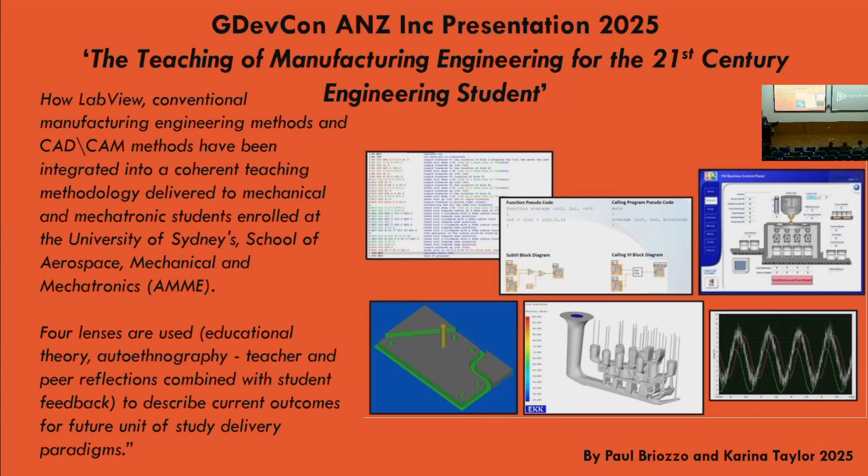All right, so where did it all sort of fit in and where were we at? The subject we ran was located in third year. It's called Manufacturing Engineering, a humble little thing. And we ran it - I was involved for about 25 years.

And then one day, I was involved in a spark ignition engine project and we needed to get data out of it. And I said, well, there's this thing called LabVIEW. It's a 1-week course. I'll go and do the course, come back and do the LabVIEW bit. And he said, yeah, that's a great idea. I did the course. Karina was the lecturer. I came back and realised, hang on, this is not easy.

So phone call to Karina. She'd left, I think, NI by that stage. And I think we were her first customer. But anyhow, that's all history.

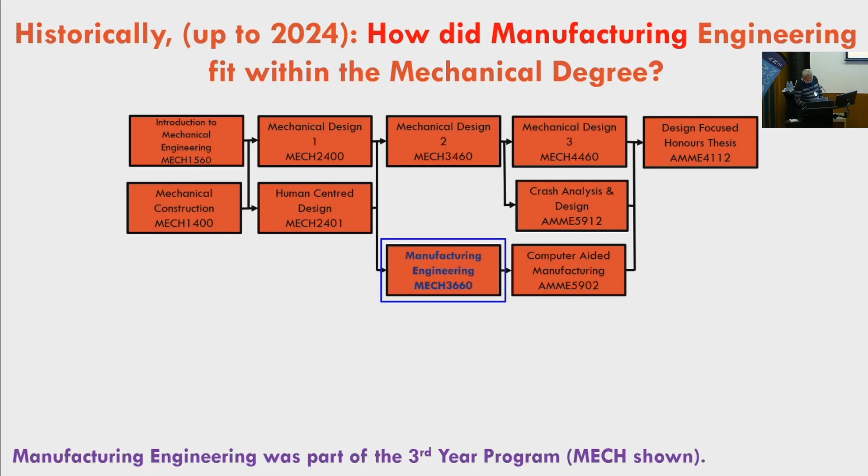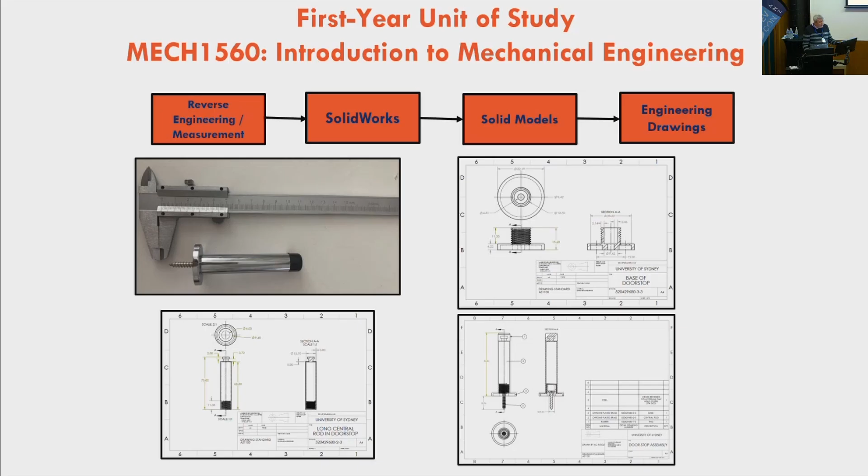So that's kind of where it fits in, sort of into the third year sort of program. And where it sort of started - typically, our students start off obviously in first year, and I'm a mechanical person. I know a lot of you here are electrical, but there's some similarities. We eventually do meet at the end, and so we give them kind of hands-on mechanical kind of projects like reading engineering drawings, becoming familiar with CAD packages like SolidWorks. And they go off and construct little steam engines or air-powered motors like this.

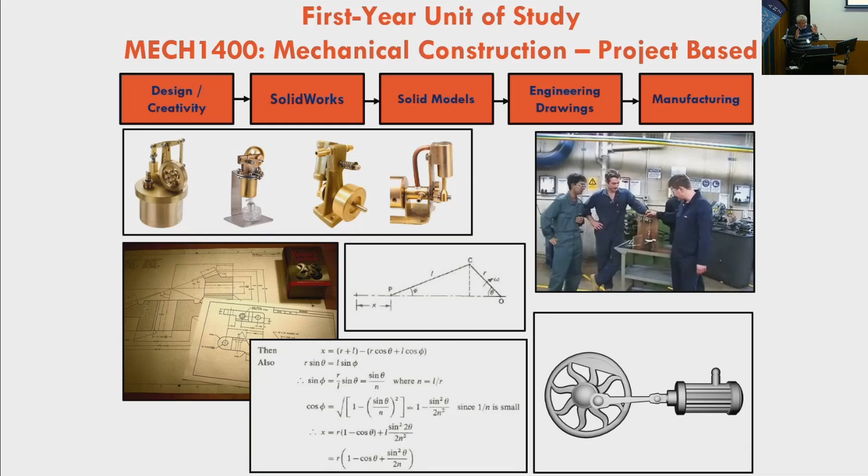We introduce analysis and the like. So gradually they're developing their hands-on skills and the ability to sort of turn something that's not just an idea into a physical kind of product, which is always good.

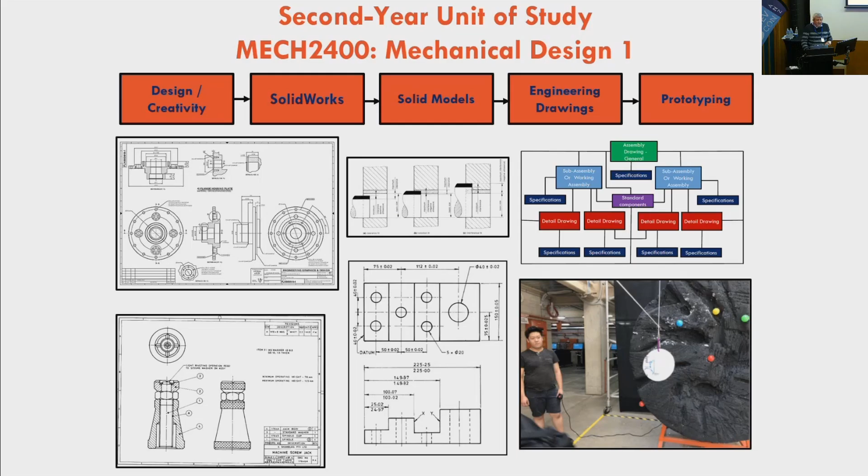Then they come to another unit of study called Design 1, which is a kind of a precursor to manufacturing. So students learn about tolerancing, more about engineering drawings. They get involved in a little competition of sorts, but no physical products are yet created. And that sort of combines with FEA type studies in Design 2.

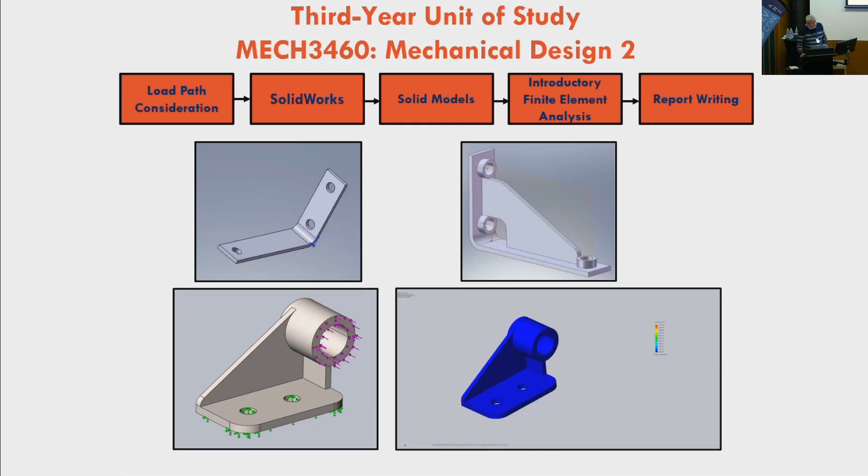I don't know if that one works. So we introduce them to stress analysis and the like using SolidWorks. And we use a finite element sort of solution for some of their designs.

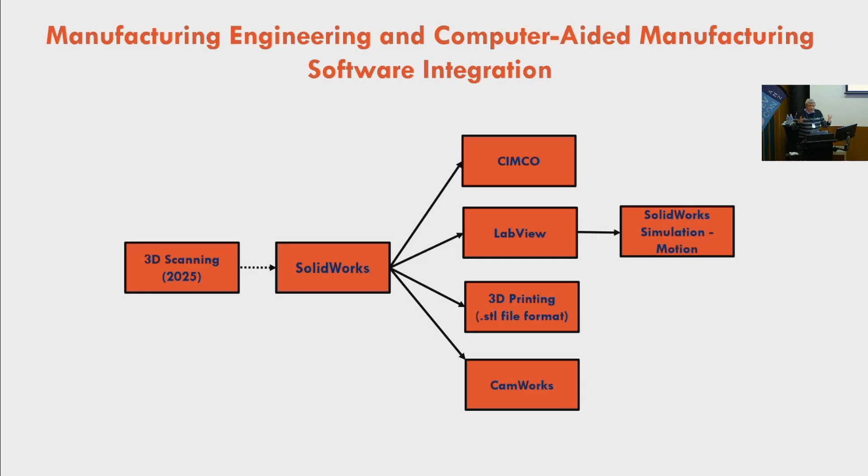So that's, if you were to break up the kind of software that they've been exposed to - and we're going to go through in a bit more depth to some of it. I think this is on auto, I'm not sure. So we've got SolidWorks and machining software, LabVIEW. We talk a lot more about SolidWorks simulation motion, controversial topic. We get them into 3D printing and also a bit more automated CNC machining. That's the sort of software that we generally use.

So there's also things like cutting forces, jigs and fixtures, structures and kinematics, casting, shrink fits, metal forming, welding processes, powder metallurgy, rapid prototyping, and a bit of a review.

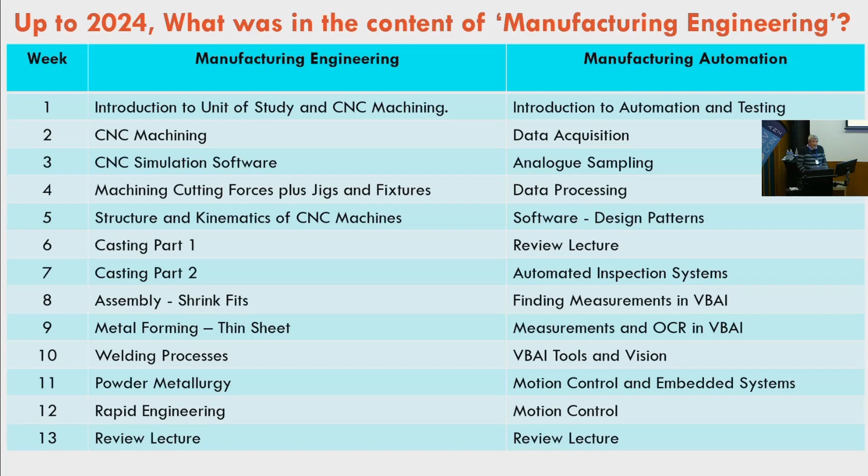So on the automation part, see if I get it right. First of all, automation and testing, data acquisition, analog sampling, data processing, software design patterns, automated inspection, measurements in VBAI, measurements and OCR in VBAI. I know them by symbols and the like. VBAI tools and vision, motion control, and the like. So quite a lot to do in 3 months, just over 3 months.

So these are students who typically have no exposure to LabVIEW. They're usually mechanical or mechatronics. So you begin to see a bit of a development.

So unpacking this a bit more, I mentioned CNC, and that's the computer numerical control side. So it's just like writing very simple little codes, machining, how to machine a little slot.

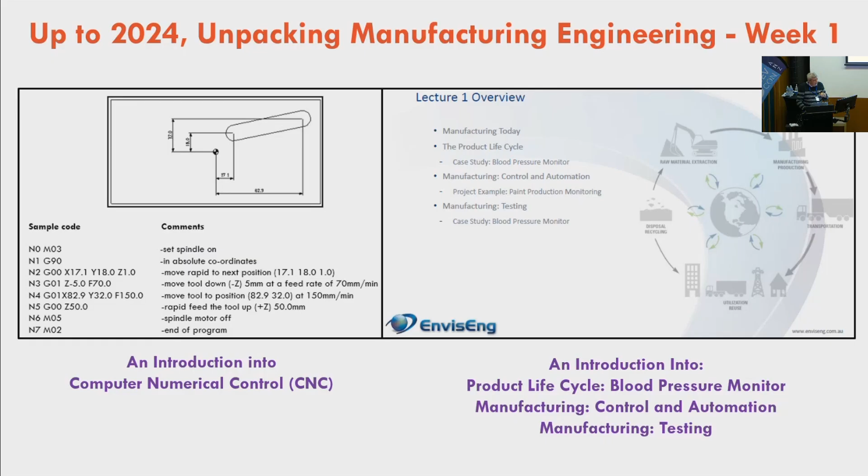And over on the automation part, we've got product life cycle, that sort of introduction to LabVIEW, testing, very important. I always loved her first lecture because it got into the whole product life cycle thing, which we don't do too much of, actually. SolidWorks CNC machining, how to write codes using a simulation package.

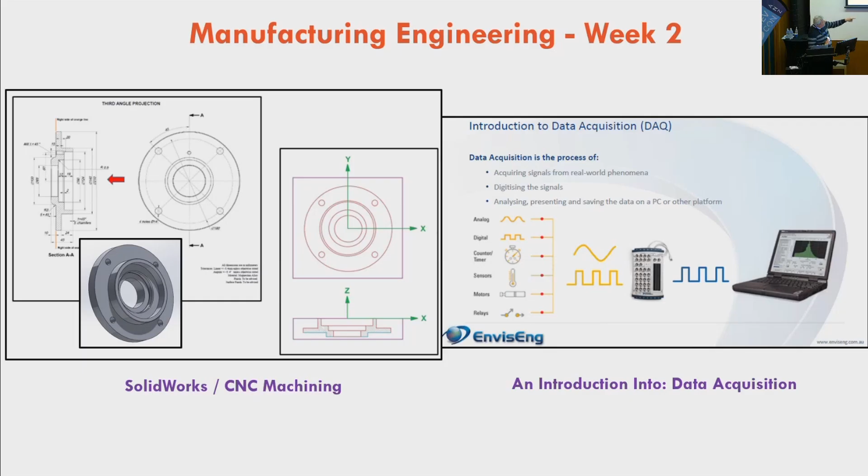And then on the automation side, some bits on data acquisition, the Nyquist theorem, that kind of stuff.

This may work. Let's have a try. Is it going to work? Yes. So we get to see a bit of machining in real time.

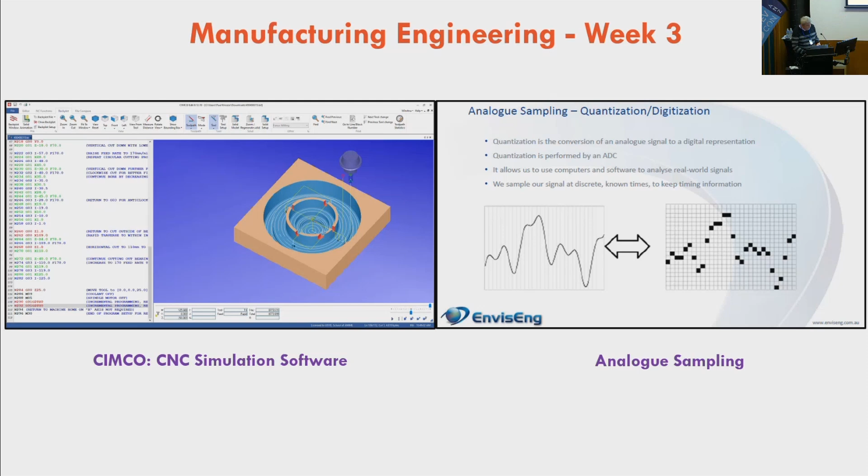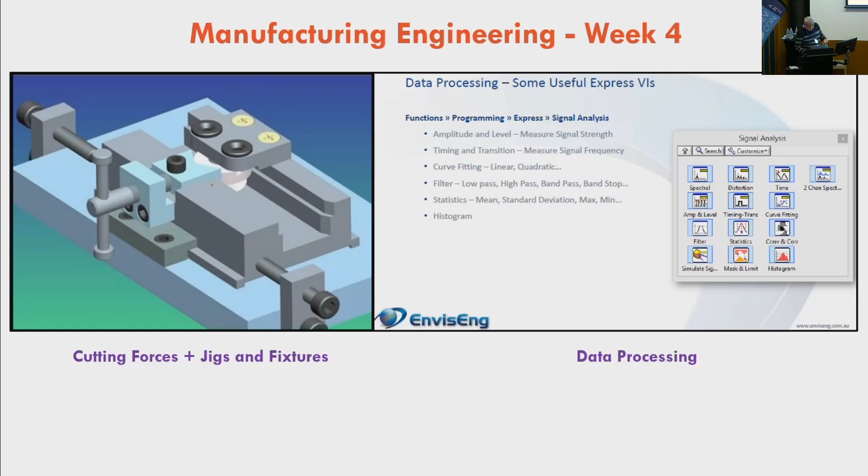It then follows through, week 4, cutting forces, jigs and fixtures. And what Karina was doing there was on data processing. No funny graphics on that one.

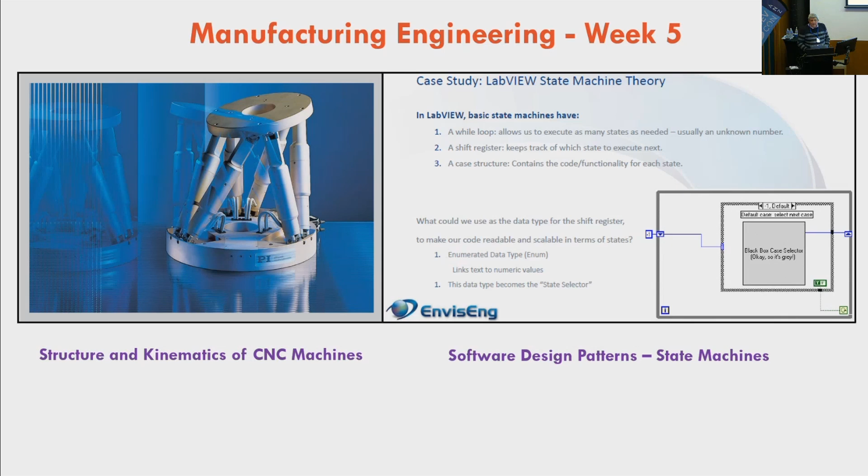Structures and kinematics of machines, sort of using different types of arrangements of machines and controlling them. And Karina was doing state machines, software designs. I think that's a pretty difficult topic for students. Better than me, I suppose.

I did casting in week 6, introducing students to more traditional kind of manufacturing processes. And I think Karina did a review on that.

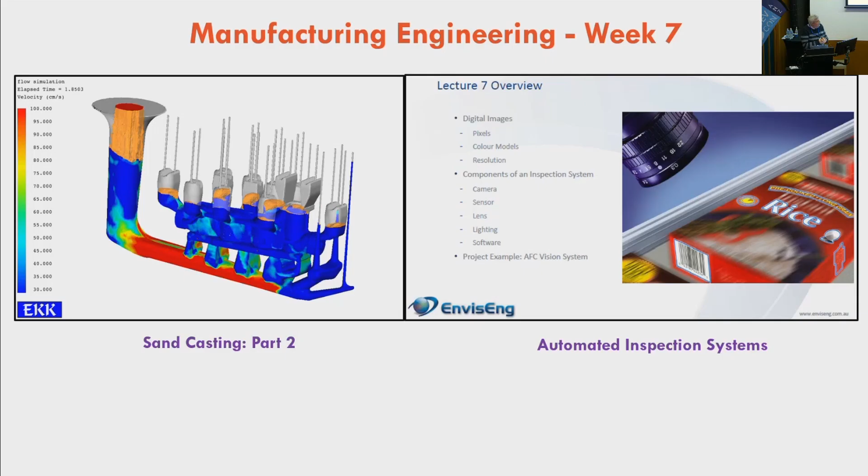Week 7, part 2 of casting, introducing fluids and that kind of thinking into manufacturing. And Karina was doing automated inspection systems.

In week 8, I was sort of doing shrink fits, how things were assembled together by either force, pressure, or varying temperature. And Karina was doing finding measurements in VBAI, bit of pattern recognition and the like in images.

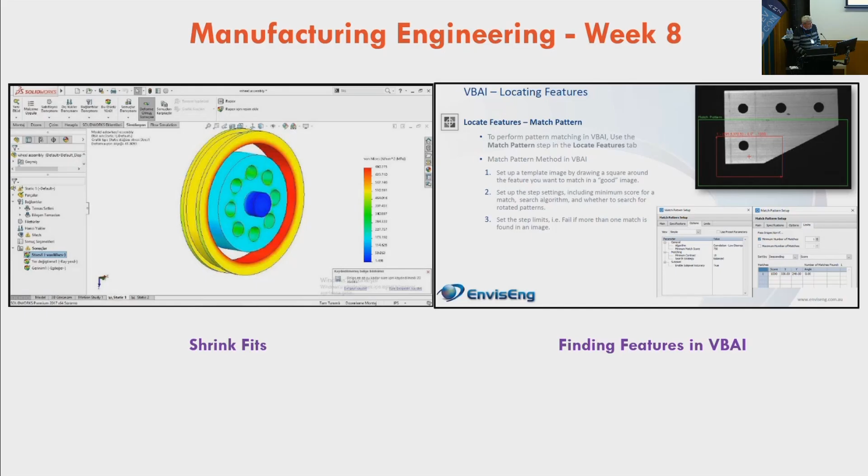Always really interesting sort of stuff. My week 9, I was doing sheet metal stamping, and we use specialized software like LS Dyna to simulate high strain rate sort of motion and how the stresses are sort of affected on sharp corners.

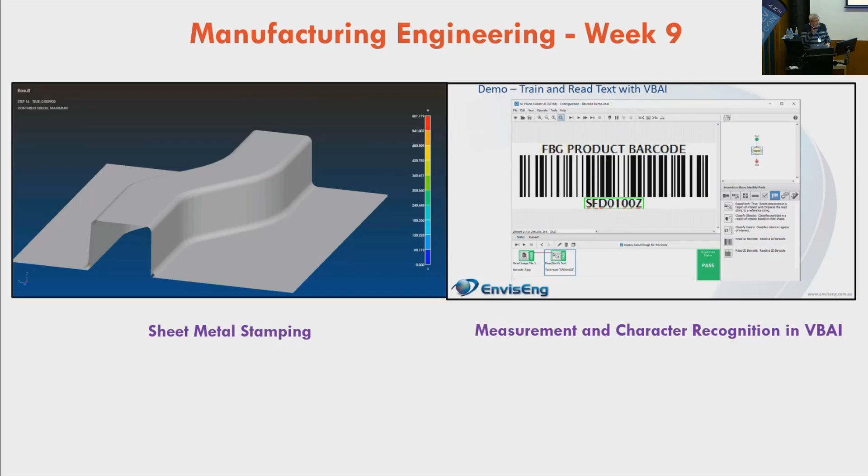And Karina was doing VBAI. And this part's really interesting because you get to read barcodes and numbers from a sample, like going along in a production line. Good stuff. So it was sort of built up into a nice course.

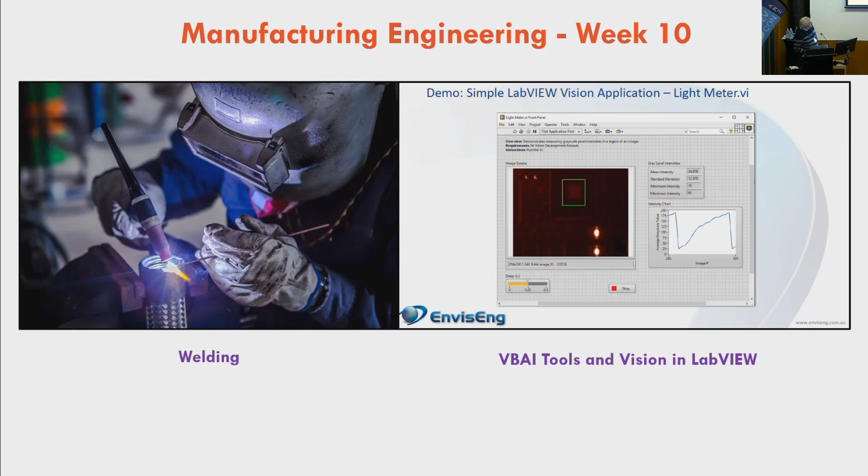By week 10, I was doing welding. Karina was doing VBAI tools and vision in LabVIEW. I don't know a lot about that topic.

But anyhow, week 11, powder metallurgy, and she was doing motion control. That's where the whole thing is good, but motion control and embedded systems, because I think LabVIEW stopped giving support to motion from 2020 onwards.

Feedback. I love it. And maybe it shouldn't have done that. Yeah, we are still limping along, okay, with old versions of LabVIEW, which suits the university in some ways because they don't have to upgrade it very often.

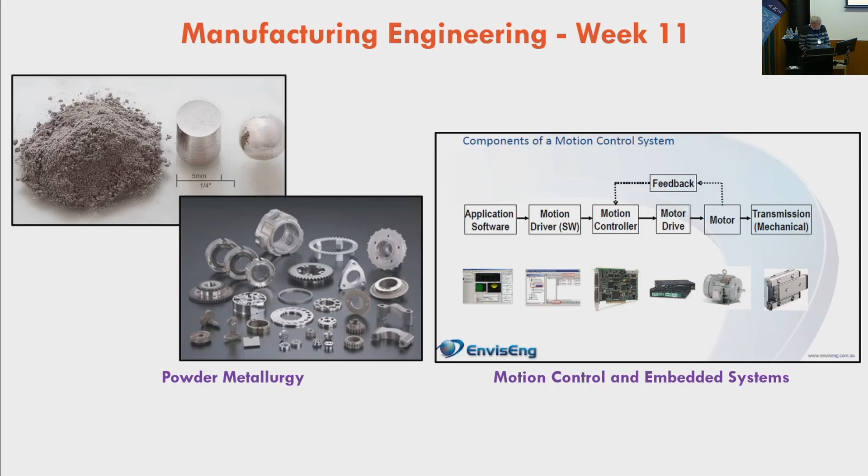We'll get to that in a bit, but we're still hanging in there. Then finally, I did powder metallurgy, and Karina got then beginning to see connections with some of the things that I taught and what she taught, motion control and embedded systems, and you'll see a word there called SolidWorks.

And that's the beginning of what we would call our little project, where the two parts of the course that seem so different perhaps to you became a bit more joined.

And what you're seeing there is, I think, there's a bit of motion control, and on the right-hand side is a sort of a linear actuator, I think we've got a stepper motor that travels along on sort of a rod. And so basically you did your little bits on the LabVIEW bit, and our linear actuator would sort of move along to get that kind of moving.

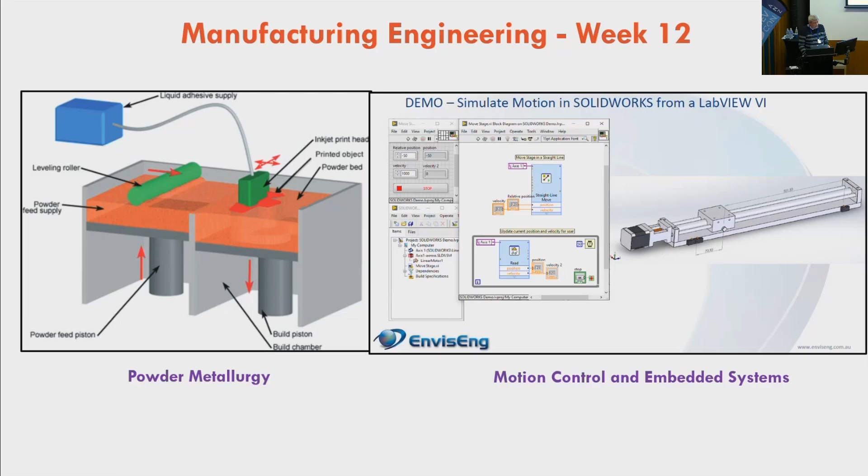And it worked quite nicely. And then finally, I think I did powder metallurgy twice, and I think she did a bit of a review. Now we'll get back to motion in a bit.

I'm not finished with that one yet. So how are we assessing them?

In the first part, they got to do their own work, I think I've run that before, but I'm going to run it again. They got to write their own codes and hand it in on a part that they design. Karina would do a yearly kind of topic, whether it'd be scales or something like that involving data acquisition. So there's two basic assignments, and each assignment had an A and a B.

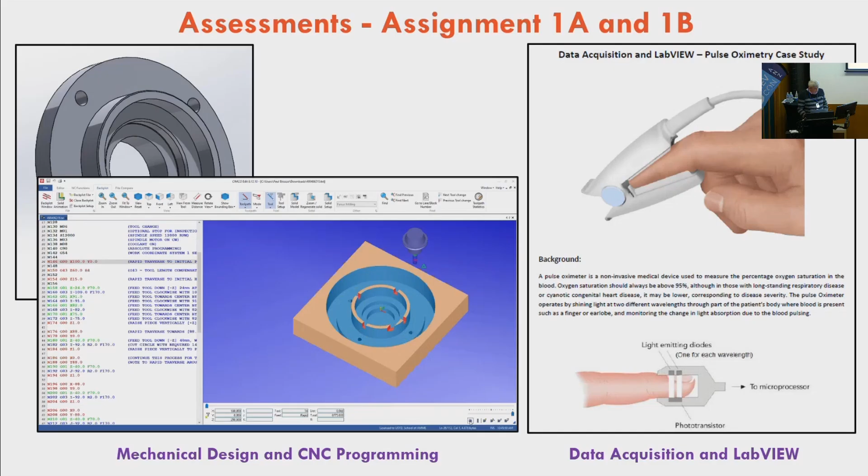So 2A was more about different manufacturing processes. Sorry, I've made my bit bigger than Karina's, but it doesn't matter. That was all about casting that particular year, but it's still interesting. Karina's bit sort of would be something like machine vision, vision builder for automated inspections. Perhaps these were going along in a production line and you had to identify chips that weren't in the right place or the like.

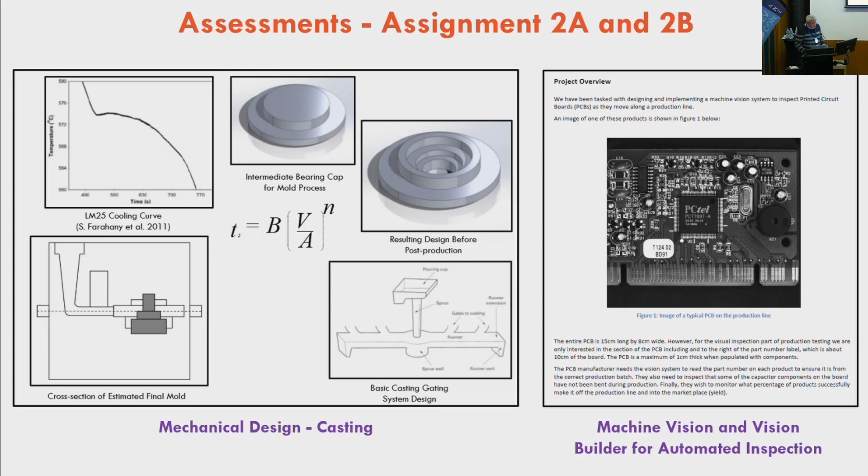And then we got onto the project. I think we gave the students about 3 or 4 weeks to do it, and it really brought the whole thing together. Now hopefully I'll play this and everything will run. What this project was about was ice cream. I think it was a machine that would manufacture ice creams. I didn't think of it, Karina did.

So if we play it, let's have a look. Is that going to work? Oh yeah, there were 2 bits to it. There was the SolidWorks motion part, which SolidWorks has its own kinematics kind of package and FEA. And that just played. How's that going along? Is that doing anything? It is moving. So the head goes along, fills it up with cream and chocolate or something like that, and everyone's happy. Now that's just a standalone SolidWorks thing.

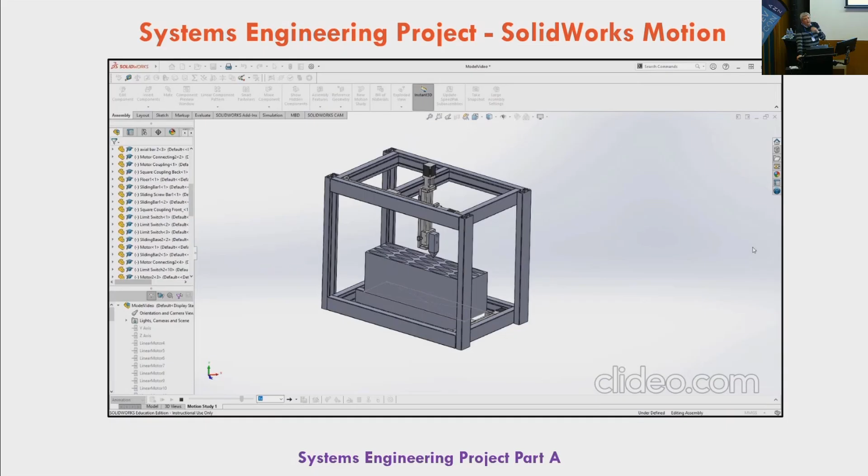There we go, more or less you get the idea. Now these are students who, like 3 months ago, knew nothing. We are moving along nicely, I think, with them. We get typically the brighter kind of students, I guess, at Sydney Uni most of the time. And this is the Karina bit, which incorporates LabVIEW. I think this might have audio. If we're lucky, we might get audio.

No. So you can see that it's time. Notice as the filler progresses through the holes that the filling LED turns on whilst the Z axis is changed, and the Z position moves from its original position at 20 centimeters to its end position at 15 centimeters, a displacement of 5. Also note that the X and Y positions are updating respectively as the system flows through each of the mold cavities. We will now see the system reach its final row, wherein it will return to its original position for us to re-click the fill operation with a new tray. We are also able to click home at any point to return to the initial state or exit the program. Thank you, all right.

Yeah, so that's where they finally kind of ended up. You can see the LabVIEW integration controlling SolidWorks. But a lot of work went into that with our IT people. We had to run at times during COVID virtual machines on the Microsoft cluster to get this on Azure computers, just to get this software installed properly, because a lot of students had struggles installing software. A lot of packages had to be installed, checked to make sure that they all talk to each other. Lots of work with Karina and IT going on in the background.

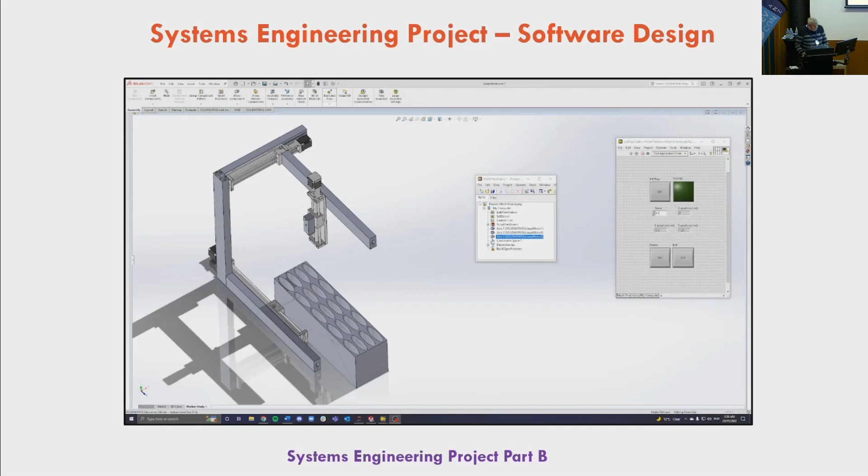It's good to get the students' perspectives, but you've got to, how can I put it, filter out the 'I don't like this' or 'I don't like that.' There's plenty of things we do in life that we don't like, but you know, you're in it, you've got to do it.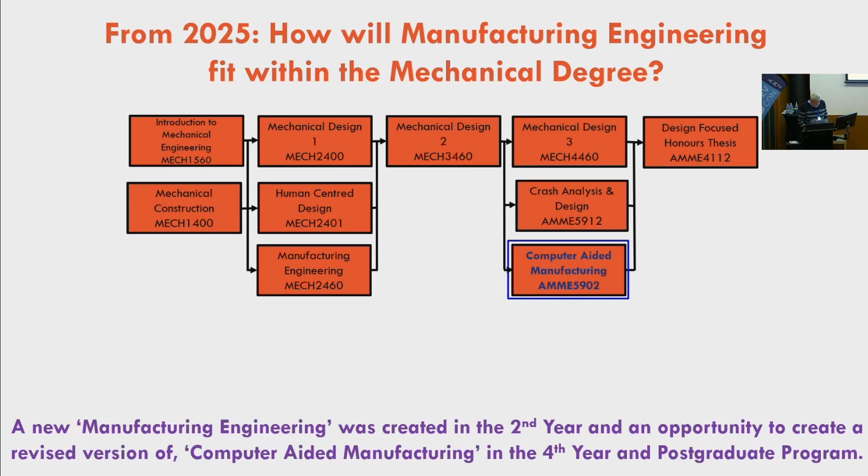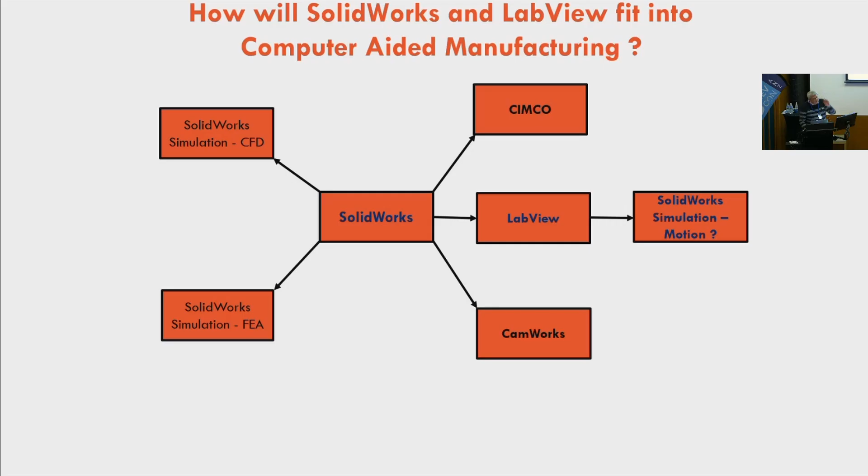So we thought about this: perhaps do we drop the whole motion thing, come up with a completely different sort of project or the like? Another way of perhaps doing it is this: what do you think should be in it?

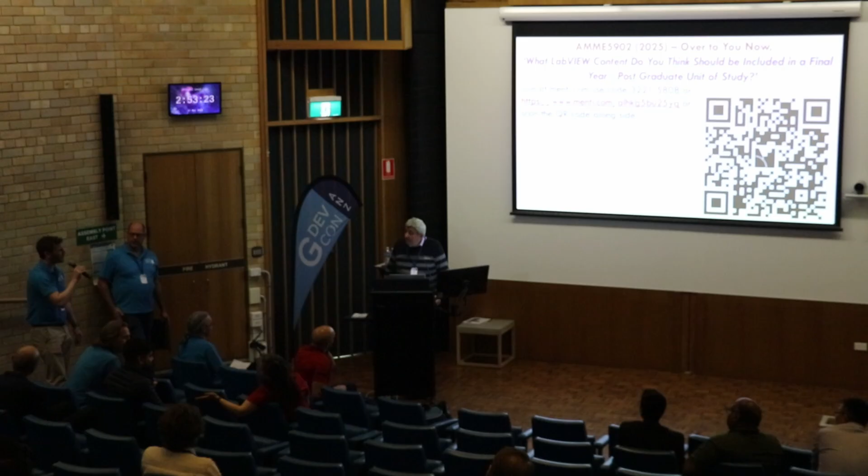Sorry Paul, one more from me, I'm very interested in this topic too. I work with UTAS, University of Tasmania. We mainly work with research projects, and they've got a site license—they could quite easily use LabVIEW in their teaching courses. How would you recommend approaching the university? Who should I talk to, to try and get it into the learning curriculum so we can produce those engineers to recruit into software?

So you've got a LabVIEW license, you just need someone to teach it. Well, I can teach it. Oh, you can teach it. I'm an alliance partner similar to Karina and Chris—you need to form, like, it's networking, you've got to meet up with an academic. Manufacturing is so broad, and that's another problem. One reason for the whole LabVIEW and Karina thing is she's actually involved in manufacturing—it's very hard to find people in Sydney who are involved in manufacturing. When I was a kid, Redfern was full of factories and the like, and that's all changed. Sydney's just not a manufacturing city anymore. You've got to find that common ground where somebody has the vision to say, this is what we need.

So is it more on the lecturer level than the dean level? Oh, it could be a dean, could be a dean. Does BRIMAC work with University of Tasmania? Yes, Dimitri's just left. I have the same challenge—if, say, Sandia is a big school customer and they say, I want to hire out of University of New Mexico, it's like, okay, does the NI seller or the partner have any former students? So as you navigate that, I'm interested to navigate it with you. Thank you.